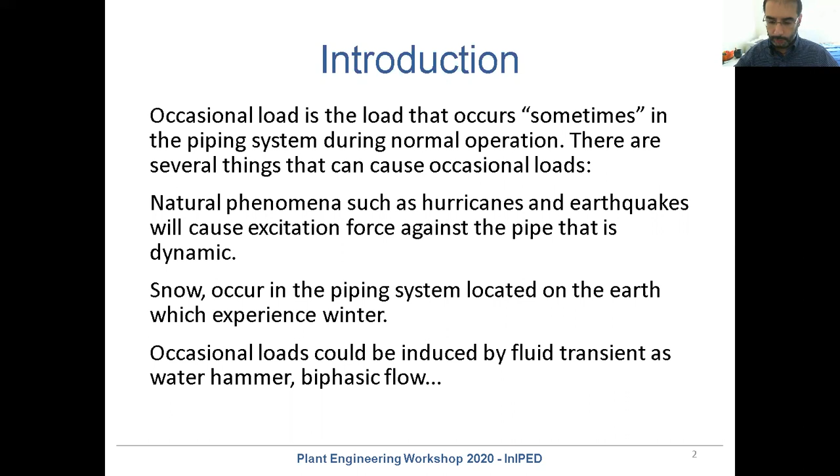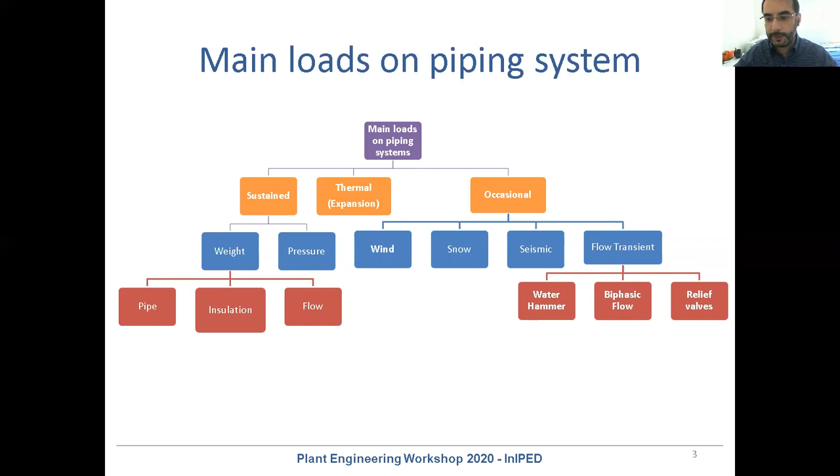The first one is sustained loads, meaning weight and internal pressure. The second group of loads is thermal, due to the temperature of the pipe and the expansion. And the third group, which is the scope of work of this presentation, is occasional. In this group you can see wind, snow, seismic due to earthquake, and a special case for internal fluid transient.

In this slide, the most common load is the sustained load, due to the weight of the pipe, the weight of the insulation, and other elements in line with the pipe like valves.

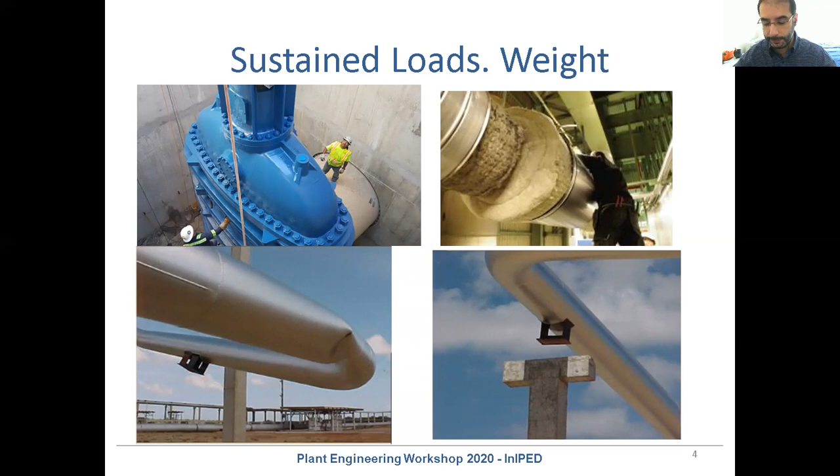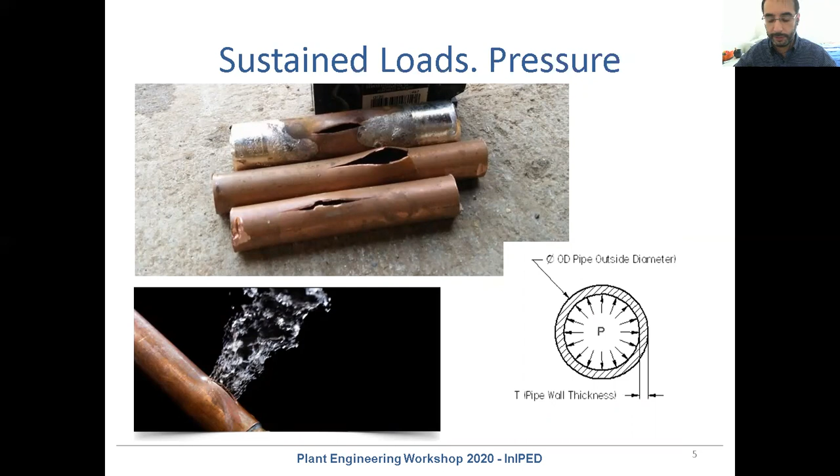The pressure is very important to define the system for the sustained case, internal pressure. Also, pressure is very important as the first step to define the flange according to the temperature and the internal pressure. This is a first step.

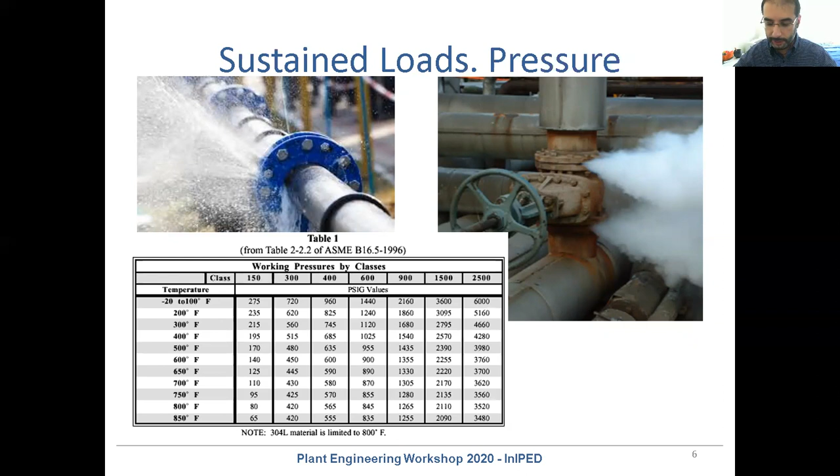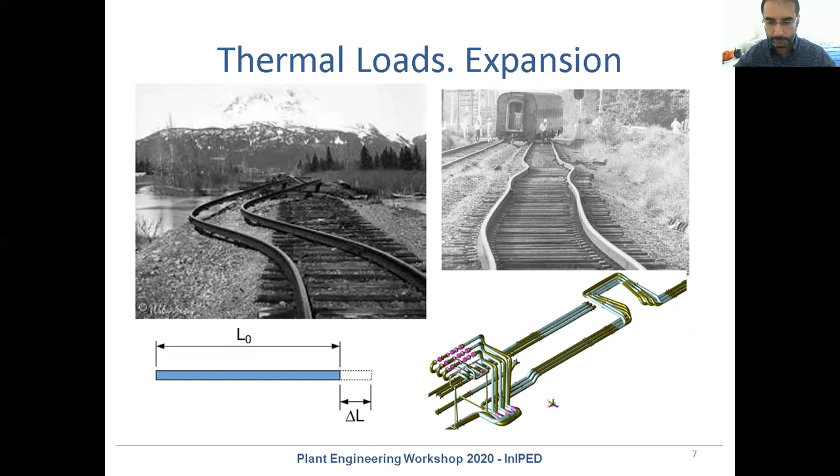The second group is thermal loads: expansion and the force due to the expansion of the pipe from internal temperature, meaning the change of the temperature.

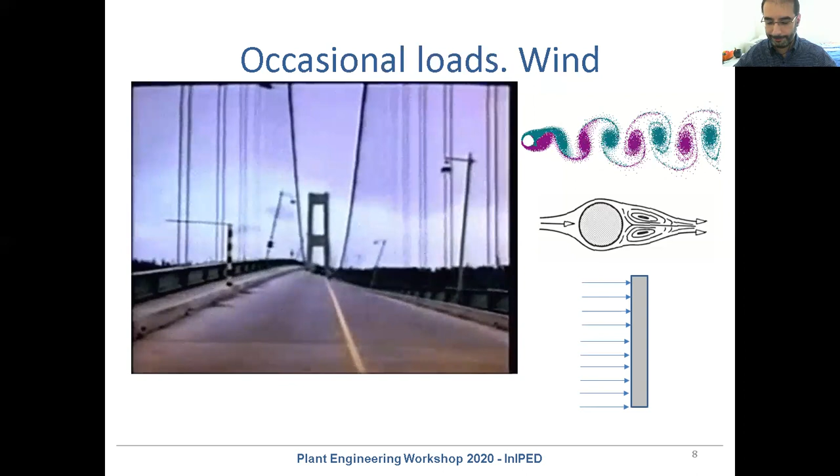Other occasional load is snow and ice. Snow and ice mean extra weight on our piping system, and this is required for our analysis, taking account of this extra weight. Usually this extra weight is accounted for by the civil codes - the maximum snow in our geographic area, national codes.

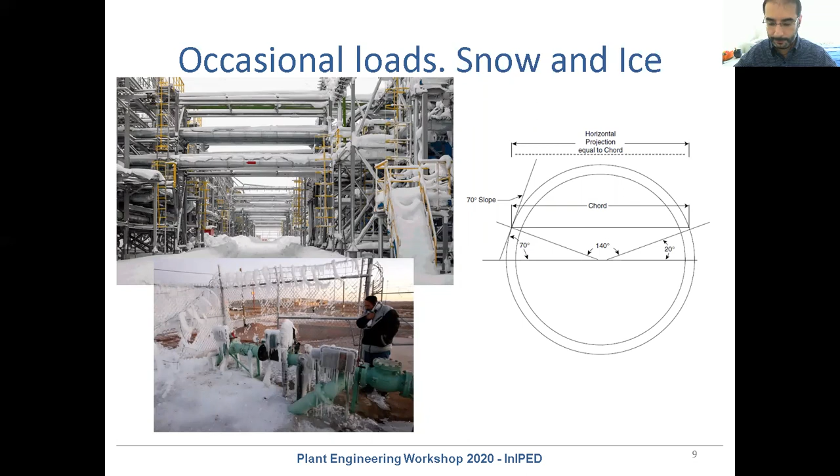Another case for occasional load is due to the quake, seismic loads. You know the movement of the ground can form different effects due to the movement of the tectonic plates. The movement of these tectonic plates creates several different waves on the ground.

The main waves for this system: the primary wave is the compression and expansion of the ground as a longitudinal movement, and the other one is the secondary wave, like in the transversal direction, like a shear. There are more waves, but we are focused only on these two to understand the problems in our system.

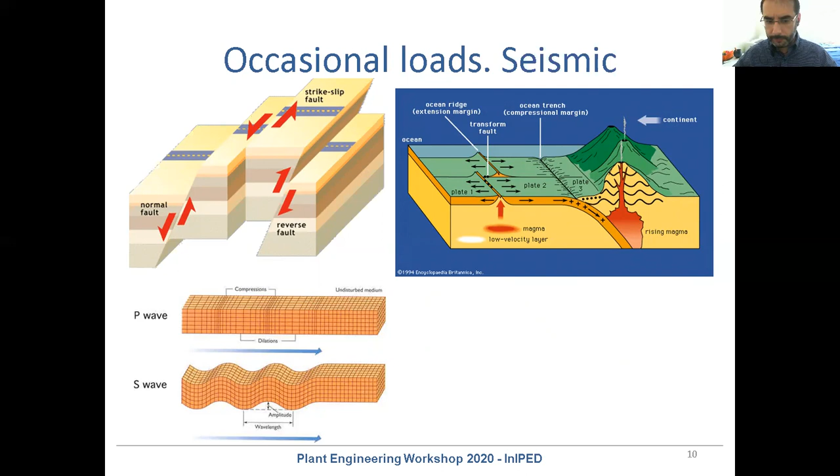Our piping is mounted on buildings on the ground, and the effect on a building is the effect on our piping. The primary wave is, remember, expansion and compression of the system - the damage is usually little. The other one, the secondary wave, is shock in a transversal direction, trying to move the building or the system in the lateral direction. The damage from this is usually bigger than the primary wave.

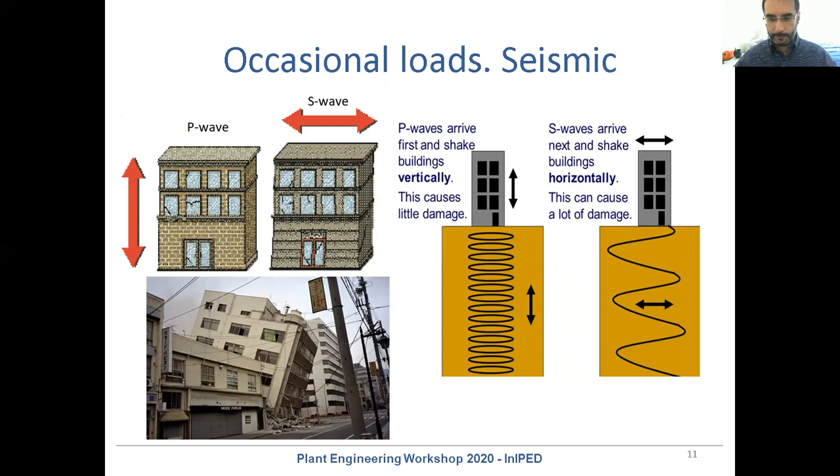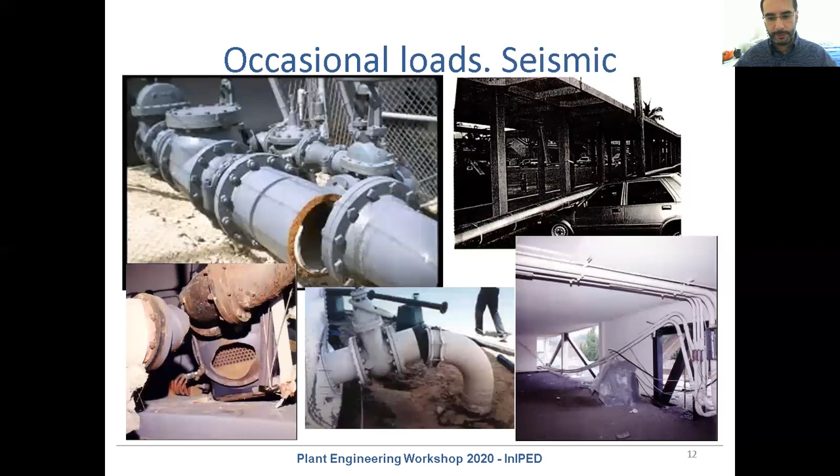The consequence in our piping system of this shaking, these lateral loads, is considered in our system for seismic design as cracking, especially when the pipe support or our equipment were not designed considering the effect of the seismic load in the design phase.

From the piping point of view, it's very important to design the pipe support taking into account this occasional load, this horizontal load. For this reason, it's common to put, for example, a bracing like this one. This is also very interesting for wind - the bracing, because seismic and wind, from the point of view of static equivalent, are horizontal loads. For this reason, the supports are very similar.

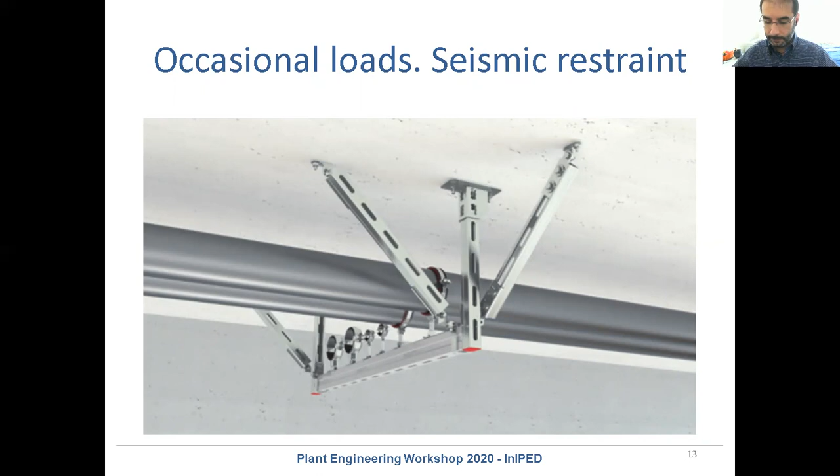Other types of support to take into account this horizontal load are the strut, which is a rigid bar, the U-bolt, which takes the force for this pipe, and other stronger supports like a guide with structural steel.

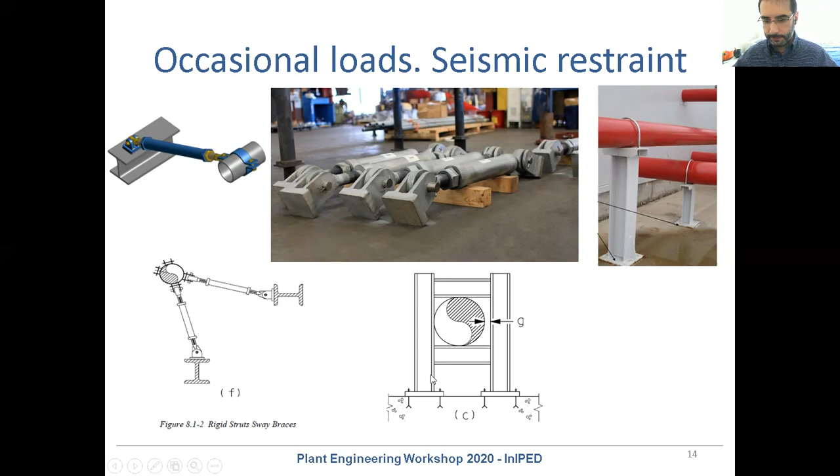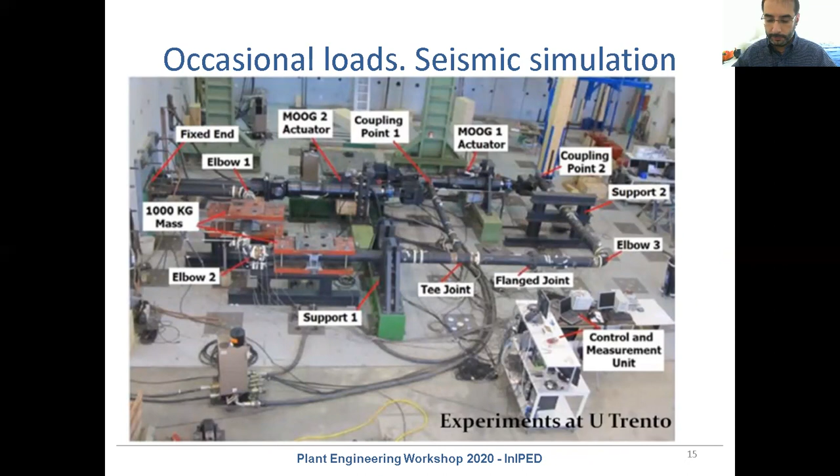And this is the other one, a model, a simplified model.

Used in university to capture the possible effects on the piping system from the shaking of the ground.

These considerations, taken into account after big earthquakes, are reflected in standard analysis and in standard international codes.

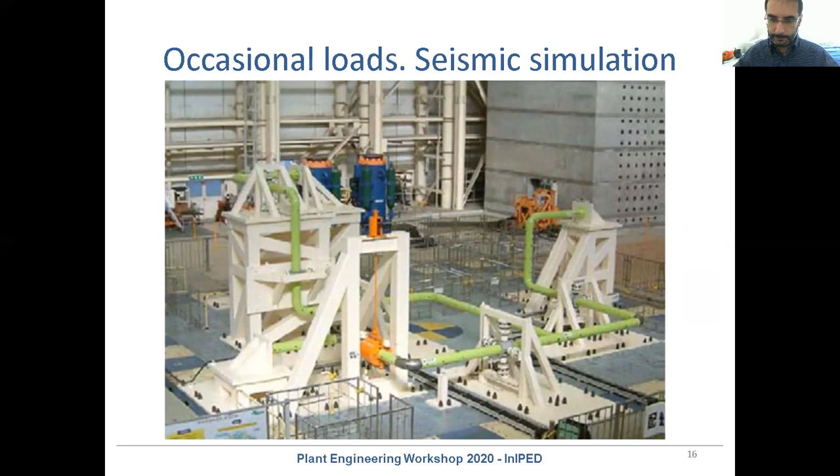And then there is another occasional load due to internal fluid transients. To define this typology is not easy.

We can divide it into 4 different groups. The effects of fluid transients are noise, violent movements, deformation, and leakage.

The first group is monophasic fluid. The variation of the velocity means a variation of the pressure.

Which means an unbalanced force on the system, and again, violent movements and leakage.

The second group is biphasic fluid, liquid plus steam. This type of fluid transient is unstable.

There are bubbles, and the problem is when the bubbles collapse.

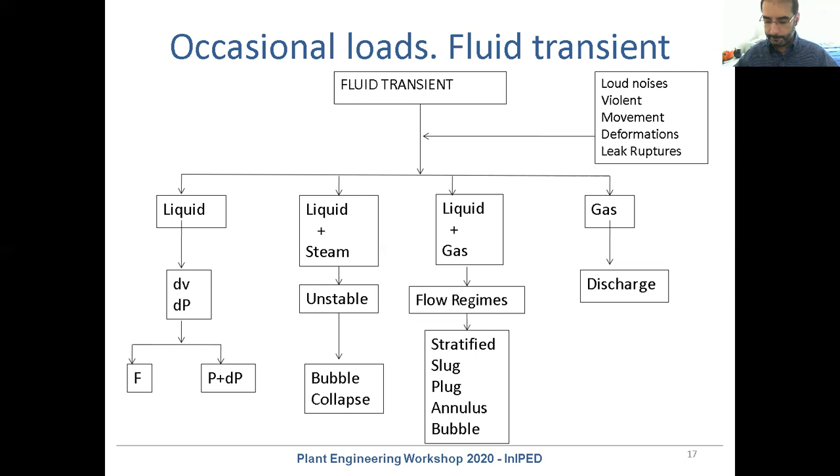First group, first fluid transient effect: water hammer. In Spanish, golpe de ariete.

The water hammer is due to a sudden change in the velocity of the flow, usually caused by a closed valve.

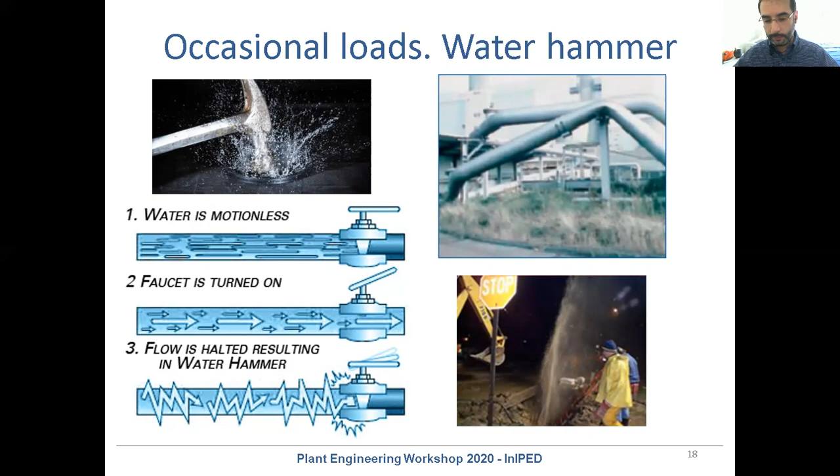In this slide, you can see a very simple example to understand the water hammer: 1 vessel, 1 pipe, and 1 valve.

Simple. The valve is also in line with the pipe.

The flow is on, the valve is open, and at one moment, the valve is closed suddenly. What happens? There is a wave in the opposite direction to the flow with a different pressure.

This wave travels in the opposite direction, toward the vessel. And at one moment, all of the pipe has the internal pressure plus this increment of pressure due to the effect of the wave.

If the vessel is not large enough, there is another wave.

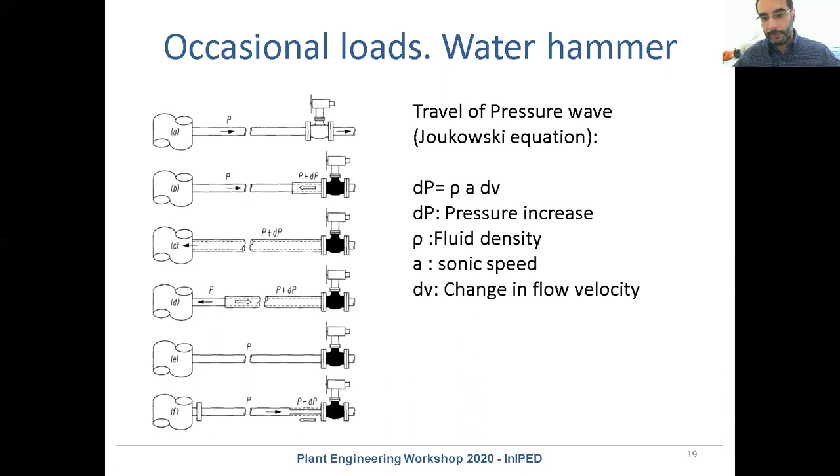Now we will see the effect of the water hammer in a water pipeline supply. We can find this movie on the internet, on YouTube.

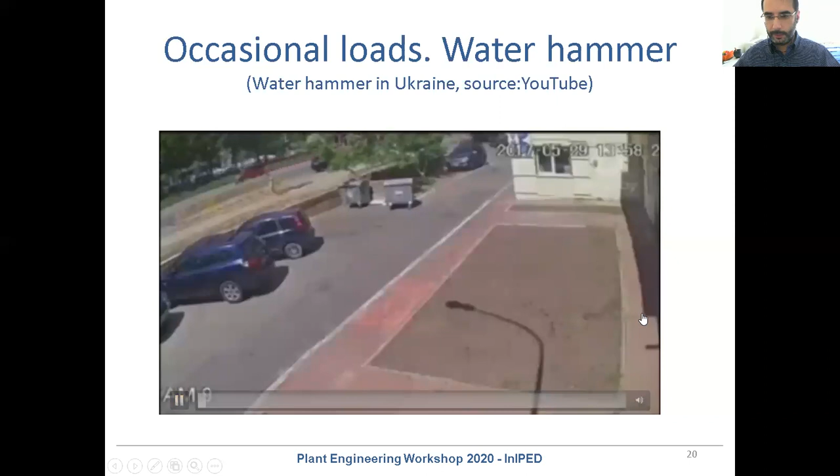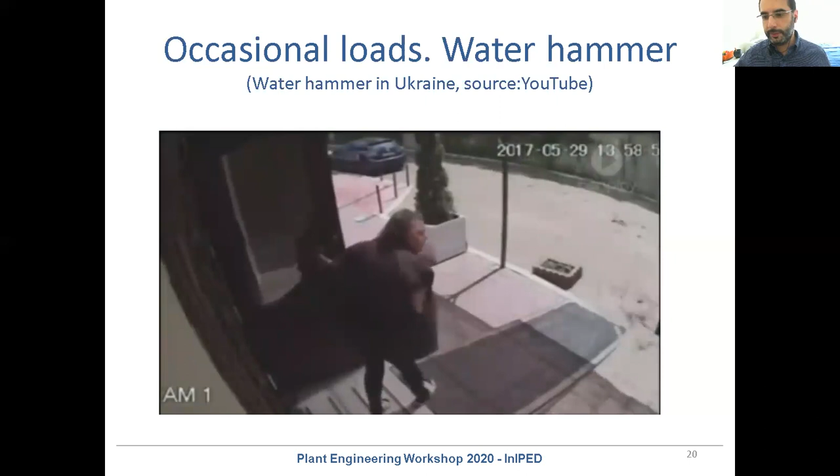It's not only an important thing from the safety point of view, which is the problem when the water hammer appears.

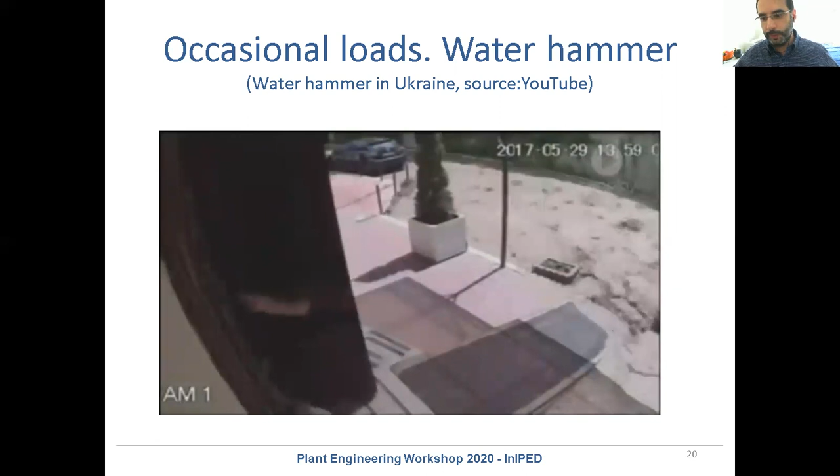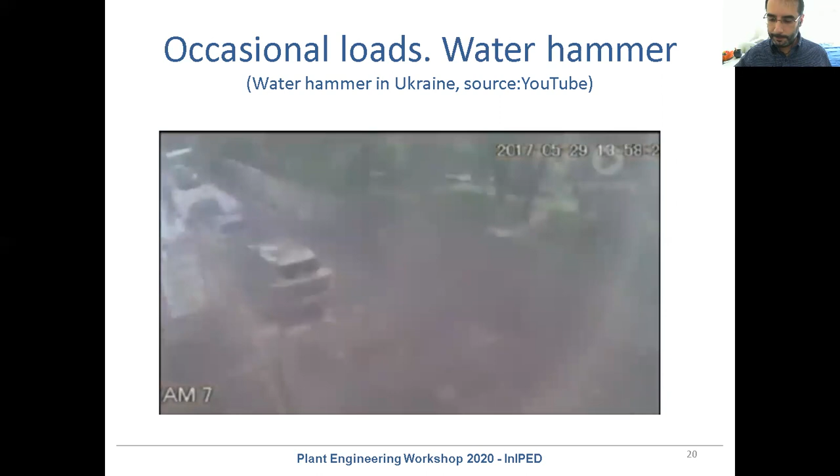Other types of flow patterns, in this case biphasic. The first one, water hammer, is monophasic fluid; this one is gas plus liquid.

When we find gas plus liquid in our system, there are 5 different types of patterns.

Bubble, the bubbles of gas inside the flow. Second, when the bubbles merge into one big bubble, this is called slug. Then, when the velocity increases, the slug is reduced and takes another shape.

And the other one: when the velocity of the gas is higher, there is a separation between the liquid and the gas.

The gas flows in the middle of the pipe, and the liquid flows close to the wall of the pipe, like separated fluids.

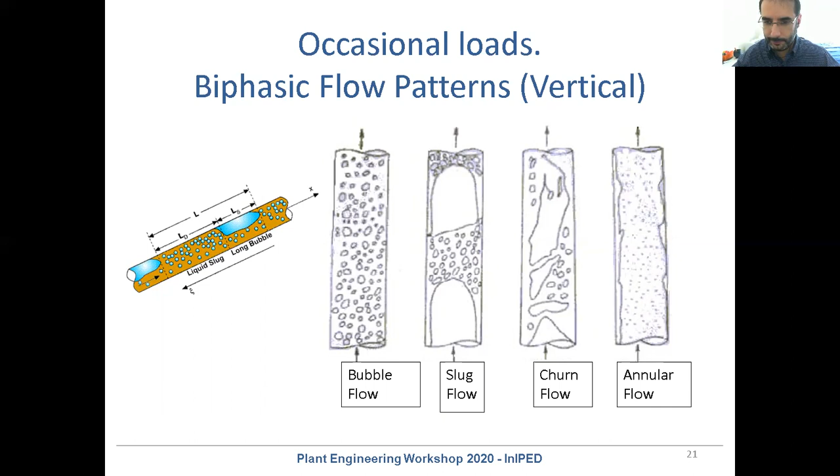Let's go. The most critical pattern for our piping system is slug flow. Why?

Because when the slug encounters an element that changes the direction of the flow, like a T or an elbow.

In the system, an unbalanced force appears, and this unbalanced force means vibration in the system.

This occurs when the slug hits, sorry, the elbow.

In this case, it's also about kinetic energy. The formulation of kinetic energy takes into account the velocity of the slug, the area (because of the mass), and the density of the fluid.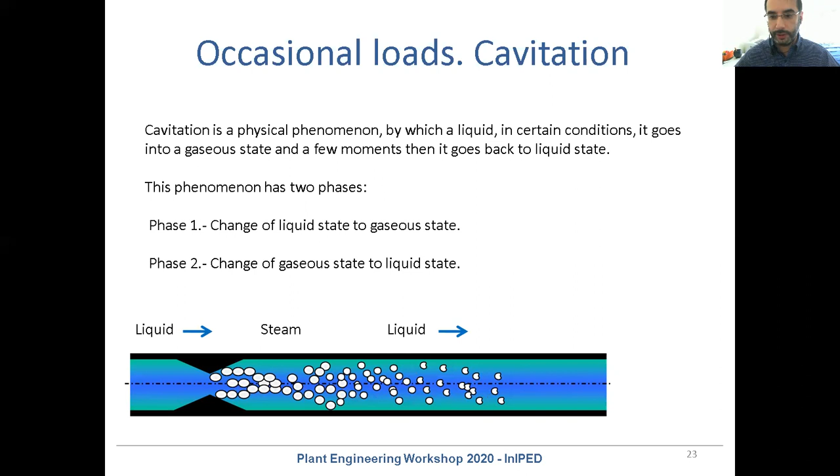Okay, this is my previous explanation. And when the bubble blasts close to the wall, the pipe wall, there is a crack in the pipe. The name of this typical crack is pitting.

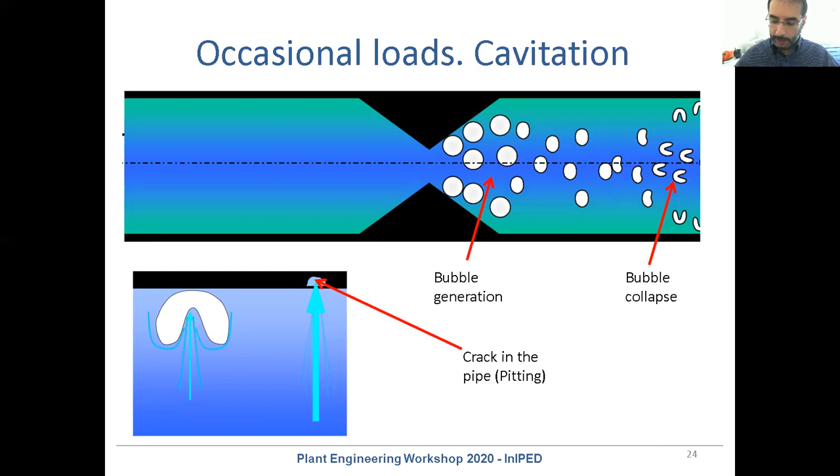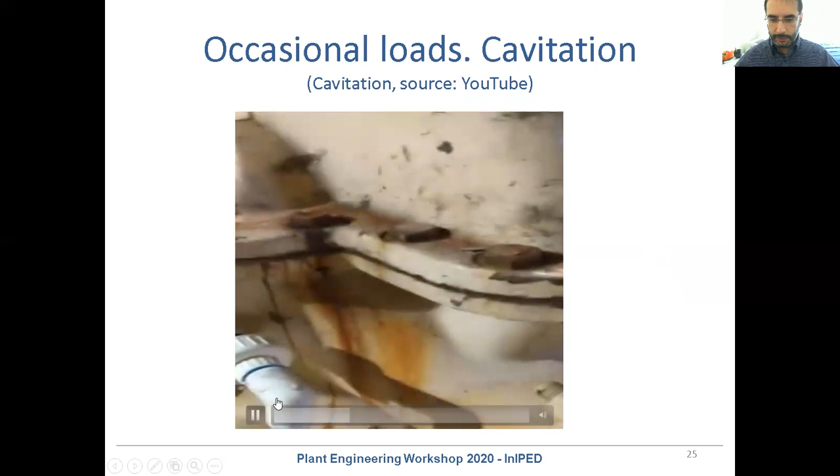But the worst situation, worse than the bubble collapsing inside the pipe, is the bubble collapsing inside the pumps, for example in the mechanical parts. We can see a movie - please pay attention to the sound of the bubble collapse inside the rotor of the pump. The noise is completely different from normal operation.

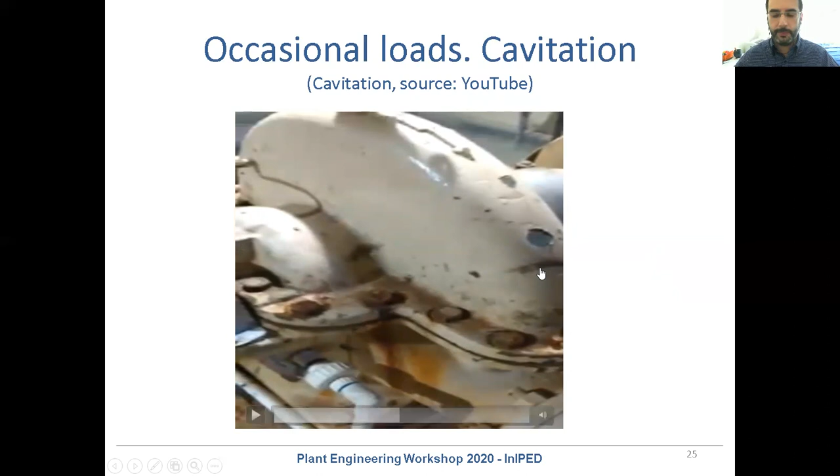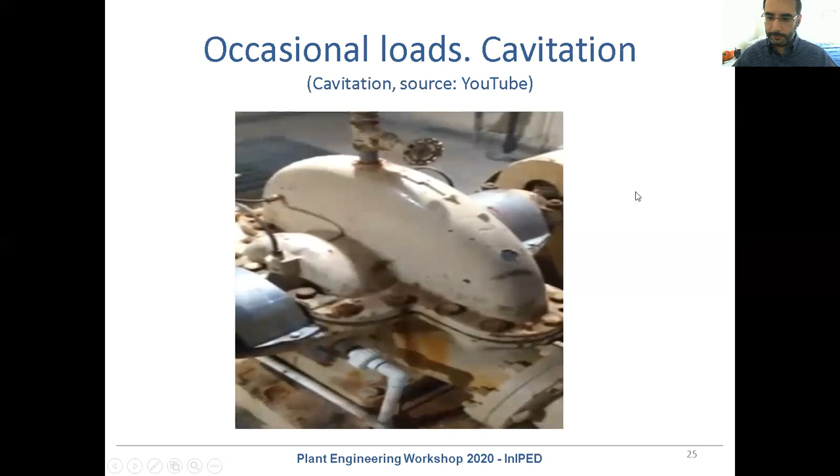Another type of biphasic fluid, steam plus liquid, is when in the same system you have steam and liquid at different temperatures.

The first problem is when there is a sudden subcooling of the steam and the steam returns to liquid, but with collapse like the previous one - very suddenly there's a shock in the system and an unbalanced force.

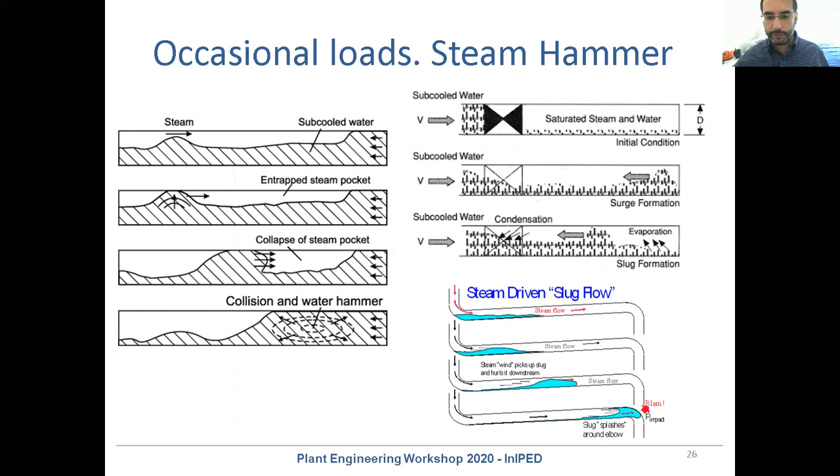Also, one of the problems for this type of system is when condensate remains in one section of the pipe, and the steam takes this liquid and pushes it in the direction of the flow. This liquid works like a slug, like the previous one we saw in the previous slide, and this also creates an unbalanced force, shaking, vibration in the system.

In this slide, we can see a sudden condensation and the resulting shock.

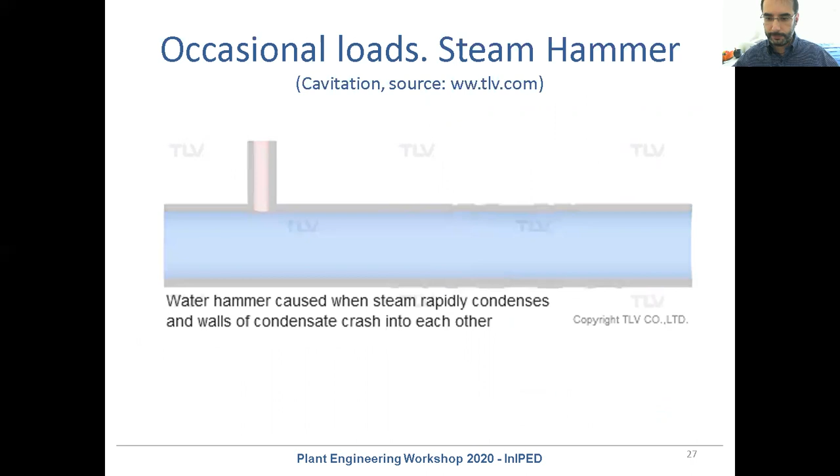One of the famous cases of steam hammer is the steam hammer in New York City. New York City has a very large system, a very large distribution network for residential steam heating. And what happened in that steam hammer?

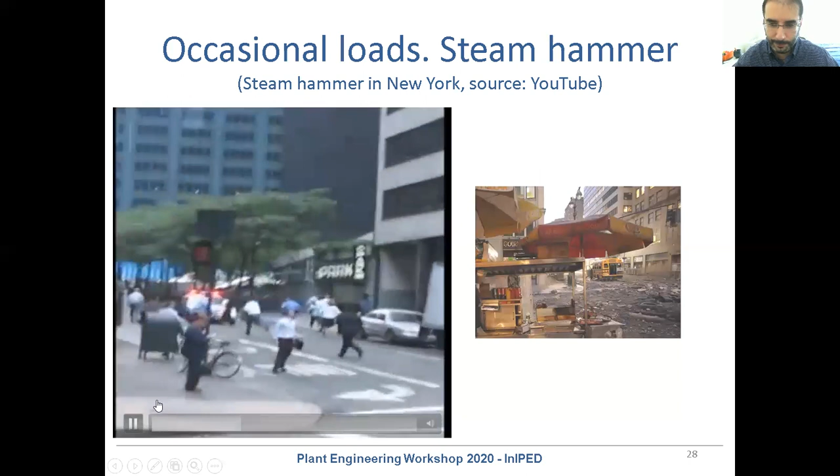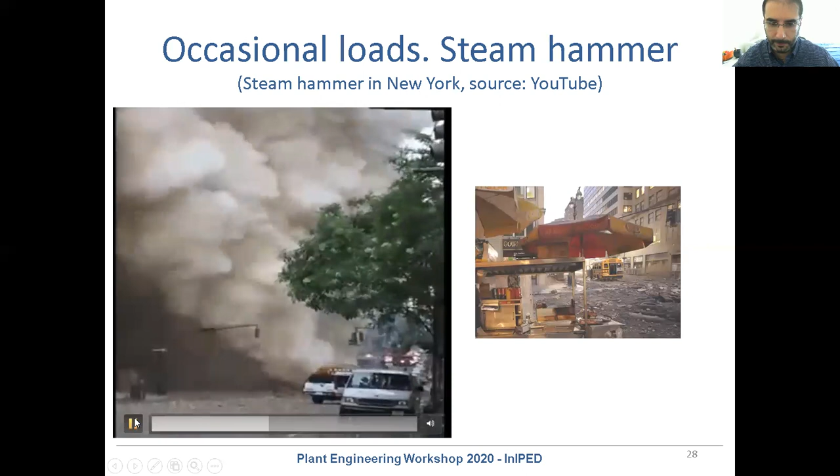And now we will see a steam hammer, but in a small industrial plant.

Also, this one is a problem from the safety point of view.

This is very important in order to design the piping system properly, to minimize the condensate remaining in the steam system. Take out all the condensate in steam piping.

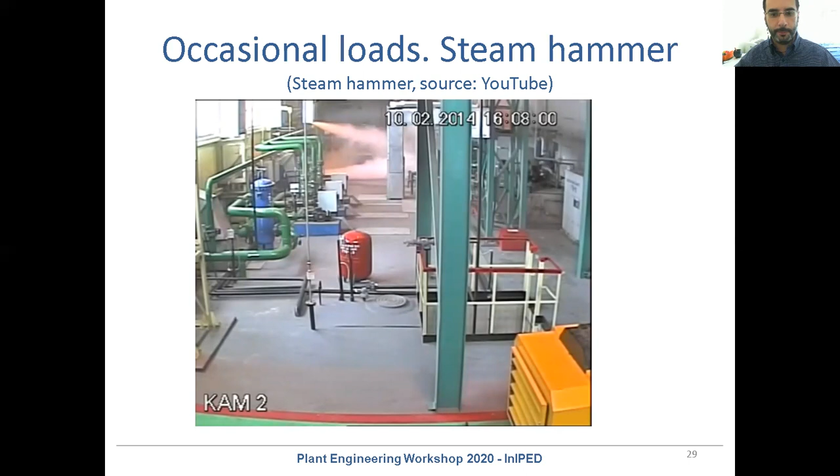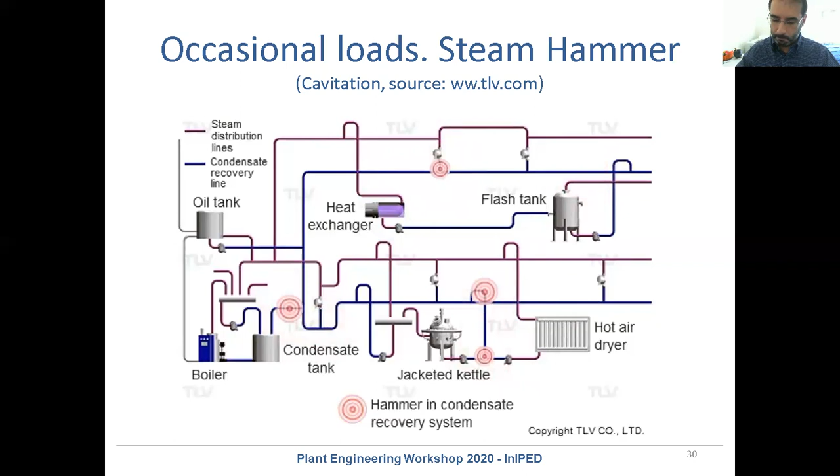And finally, we return to monophasic fluid: the relief valve. What is the purpose of a relief valve? There is one main system, and to avoid overpressure in this main system, we supply a relief valve.

The relief valve only works when the main system is in overpressure. The advantage of this valve is that it removes enough flow from the main system in order to decrease the pressure in that main system.

When there is overpressure in the main system, the spring inside the relief valve moves up, opening the valve, and there is a fast movement in the valve - a fast liberation of fluid to decrease the pressure of the main system.

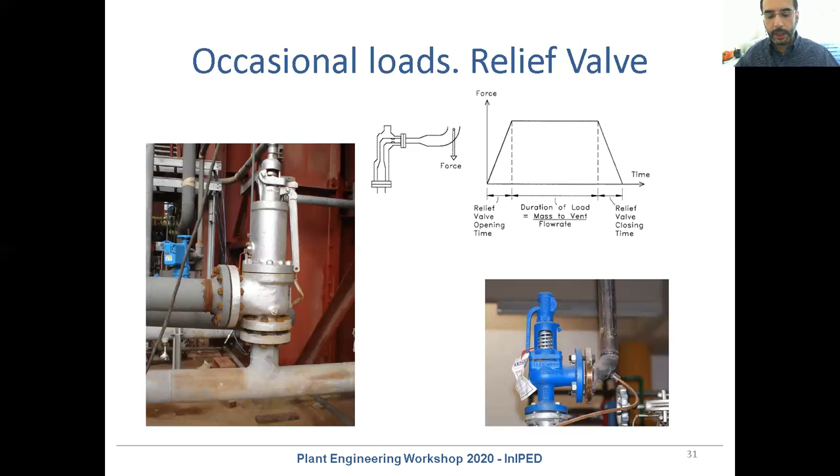When there are elements like bends or tees in the system - elements which change the direction of the flow - we will have an unbalanced force. And this unbalanced force means vibration and fatigue, and it requires taking into account the size of the source, the size of the force, to design our system.

As a summary: sustained loads and thermal expansion shall be included in order to validate normal operation in the piping system. But additionally, according to piping standards, occasional loads must be taken into account, designed to avoid critical failure and safety problems.